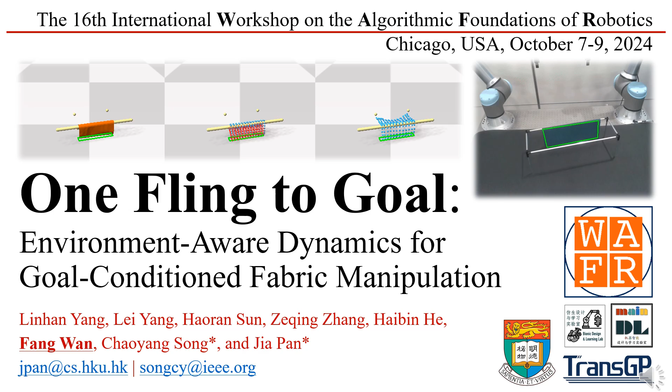In industrial settings, swiftly and accurately moving fabrics to target positions for downstream tasks is a common operation. Workers often employ dynamic flinging motions to enhance efficiency.

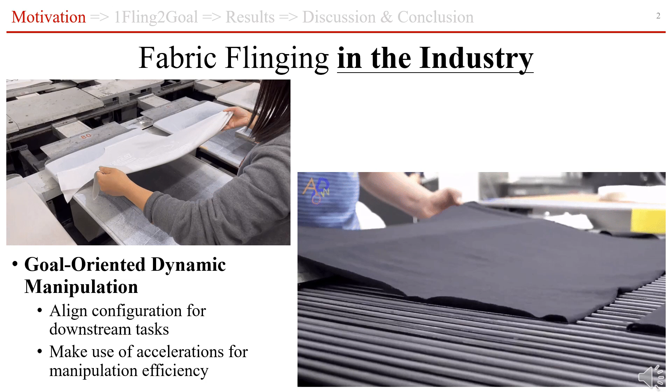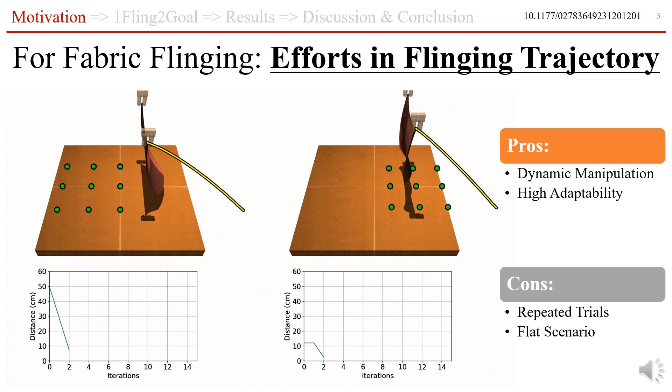This observation raises our first challenge: can we train robots to achieve precise fabric positioning in one fling? Previous research often involves robots making multiple attempts to learn the delta dynamics between each trial, continuously optimizing the fling trajectory to reach the target position. However, multiple trials reduce efficiency, and delta dynamics are difficult to generalize to complex environments, typically only being effective in flat scenarios.

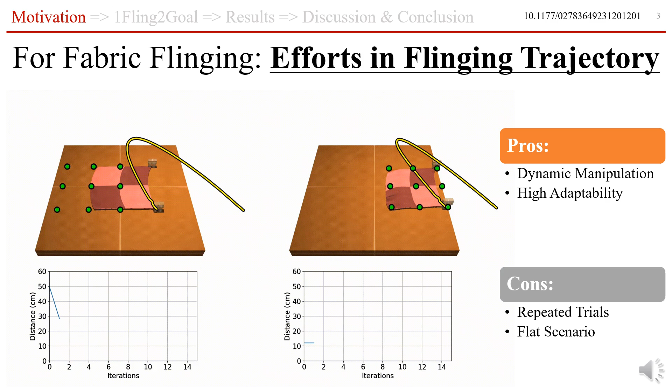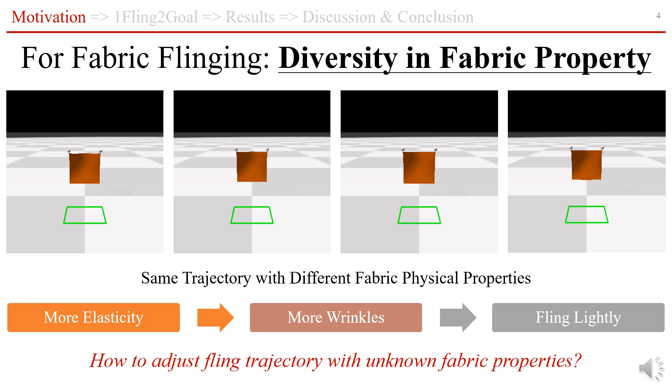Furthermore, fabric properties significantly influence the outcome of the fling. For example, with the same trajectory, more elastic fabrics tend to produce more wrinkles, needing a lighter fling. This diversity leads to our second challenge: how can we adjust the fling trajectory when fabric properties are unknown?

Beyond industrial applications, fabric manipulation tasks are commonly used in daily life, where environments are more complex and often involve interactions between the fabric and surrounding objects. This complexity introduces our third challenge: can we encode the rich interaction between fabric and environment for robotic manipulation?

To address these challenges, we propose One Fling to Goal. Our objective is to manipulate the fabric dynamically into the target state with only one fling in complex environments.

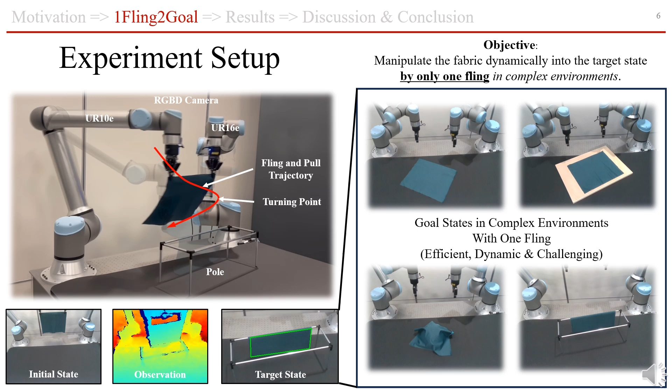We begin by training a dynamic model of the fabric, where the state is represented as a point cloud. We employ a graph neural network, GNN, to predict the fabric's point-wise velocities at the next time step, capturing the complex dynamics involved in fabric manipulation.

To enhance the dynamic model's performance during interactions with the environment, we integrate environmental information into the node features of our GNN. We term this approach environment-aware state representation. For each node, we calculate the distance between the fabric point and the nearest object point in the environment. Later, we will show our model more accurately predicts motions by involving fabric-environment contact.

We collected training data from the PyFlex simulation environment. During data collection, we randomized key parameters related to fabric properties, such as weight and size, which allows our model to have good generalization capabilities across different fabrics.

With the dynamic model, we implement a two-stage model-based control strategy to optimize the fling trajectory. In stage 1, we acquire the fabric's current state using the RGBD camera.

In this work, we simplify potential trajectory to a fling then pull movement, which can be parameterized by a single turning point. To get an initial estimation of the fling trajectory, we randomly sample 50 turning points, then utilize the dynamic model to infer the final state for each sampled trajectory. We select the optimal trajectory, whose final state has the minimum distance to the target state.

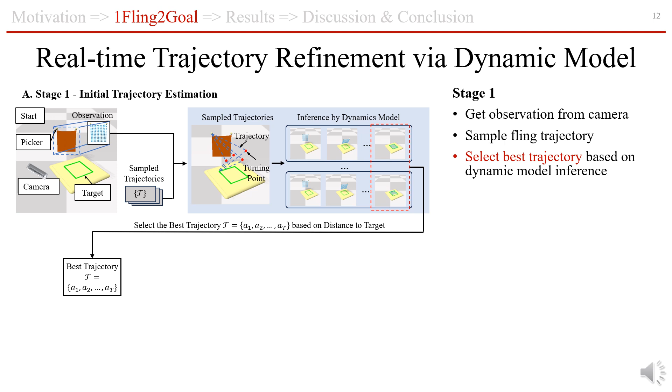Despite this initial estimation, unknown fabric properties may prevent accurate task completion. Therefore, we implement real-time refinement of the fling trajectory. At every 10 time steps, we sample 9 delta actions to adjust the current action of the initial estimation. Here delta actions include faster, slower flinging movements, as well as no change to the initial estimation.

We select the best delta actions based on the dynamic model's inference. For instance, if we detect that the fabric is highly elastic, we adjust by reducing the fling speed appropriately. At each control step, we update the fling trajectory and the fabric's current state, ensuring that adjustments are responsive to real-time observations and predictions. Through this iterative process, the fabric is eventually manipulated to reach the target state.

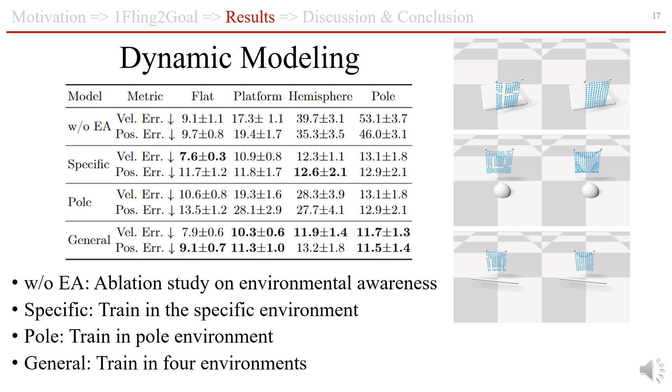We evaluate the performance of the proposed GNN dynamic model through a series of comparative experiments. The results show that incorporating environmental awareness into the fabric representation and collecting data across multiple scenarios significantly improve the model's accuracy and generalization.

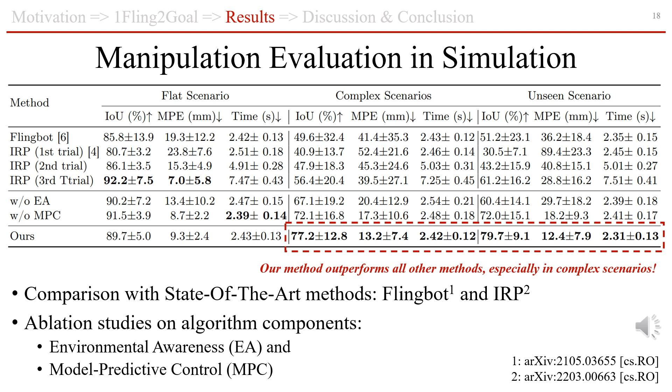For the goal-conditioned fabric manipulation task, we compared our method with state-of-the-art approaches such as Flingbot and IRP. We also conducted ablation studies on key components of our algorithm, namely environmental awareness and model predictive control. The experimental results indicate that our method exhibits notable stability and generalization, especially in complex environments.

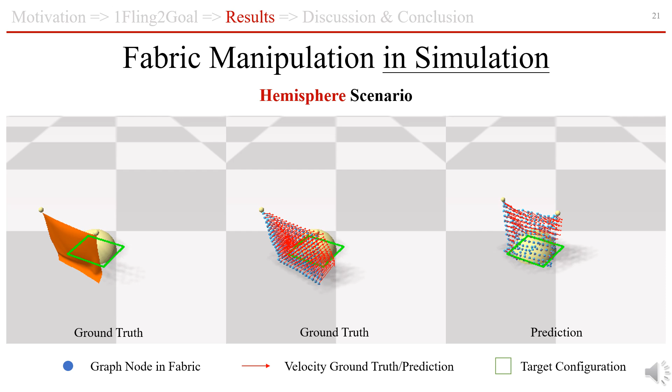Platform scenario. Hemisphere scenario, and pole scenario with environment awareness.

The proposed two-stage strategy transfers seamlessly to real-world robotic experiments. We randomly place the fabric within the workspace and allow the robot to plan an initial trajectory to fling the fabric to the target position, and do real-time adjustment according to the RGBD observation.

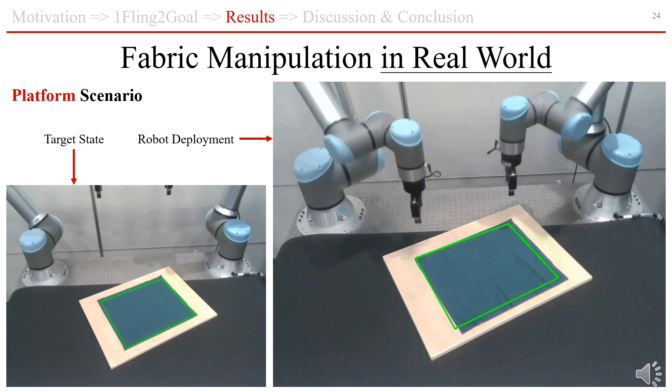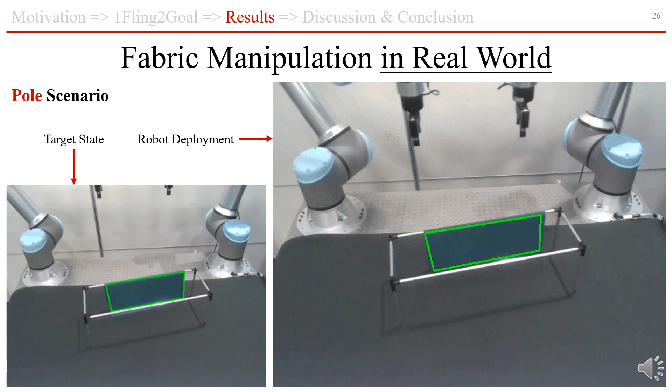Our method proves to be effective across various settings, including flat surfaces, platforms, hemispheres, poles, and stools.

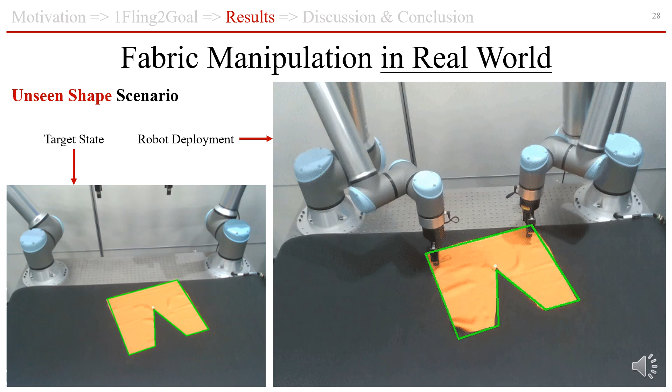We also validate our approach on unseen fabrics with novel shapes and unseen folded target states. It works well since our dynamic model is generalized and target-free, and the control strategy is applicable to any feasible target.

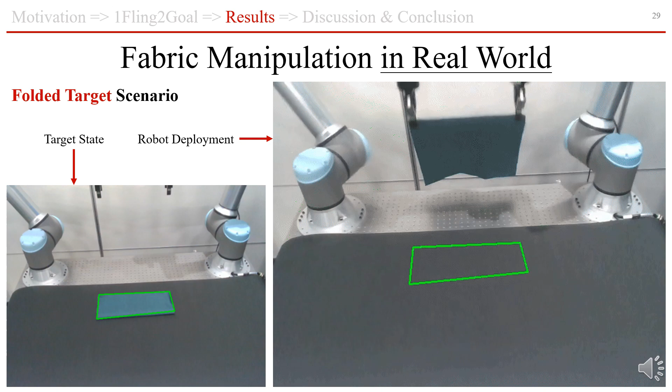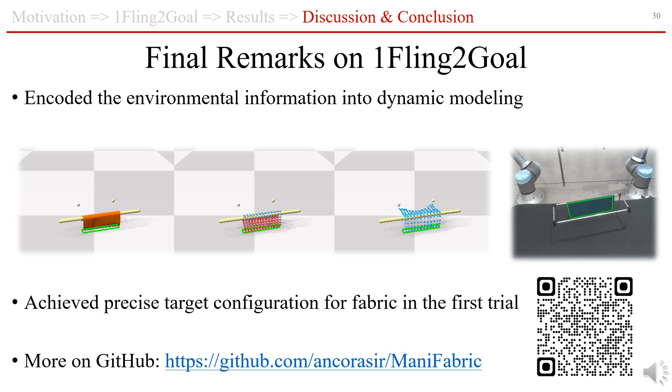In summary, we propose a method that encodes environmental information into the dynamic model of fabric, achieving precise fabric manipulation in one fling. Our approach addresses the challenges of unknown fabric properties and complex environmental interactions.

There are some limitations. Inaccurate perception due to fling speed and partial observation can sometimes cause the fabric to contact the environment too abruptly, leading to task failure. Additionally, the model's effectiveness can be limited when interacting with unseen fabric configurations that differ drastically from the training data.

Future work will focus on improving the robustness to perception accuracy and extending the model to more diverse task configurations.